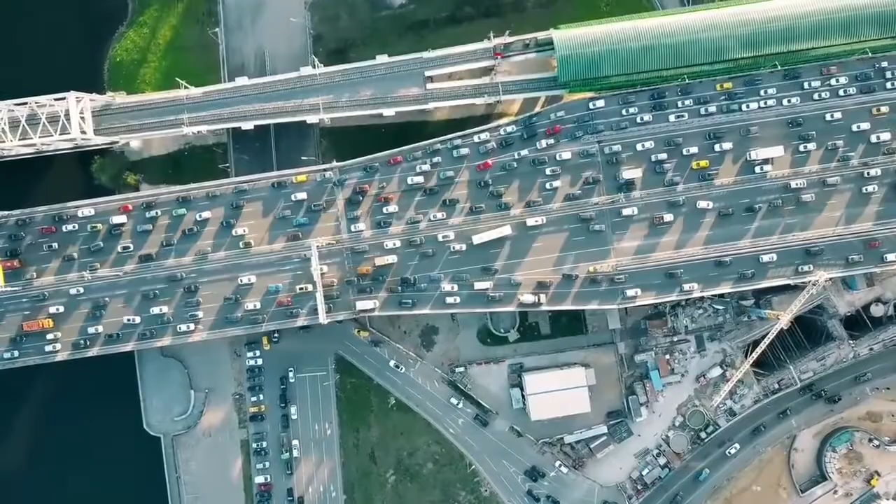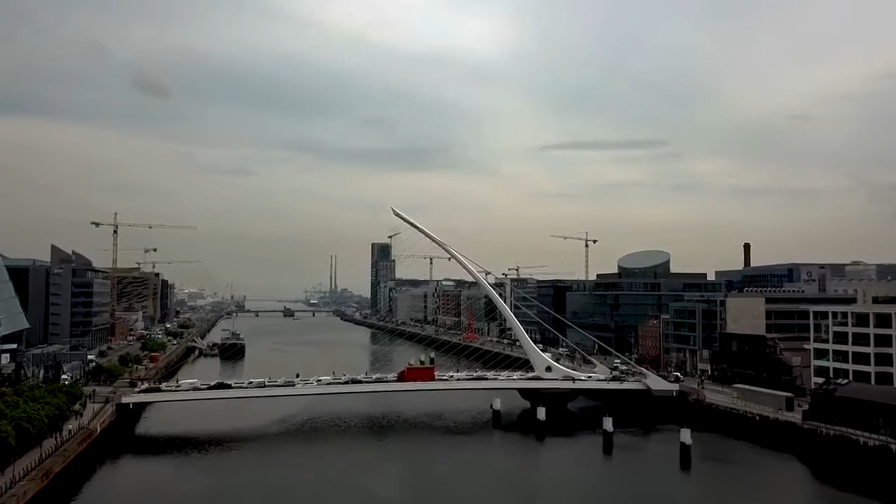This is a problem that primarily affects young people, and those who already own their home have little interest in devaluing it by allowing high-rise developments near their home, and thus increasing supply. There are political motivations and many more factors that change why and how bubbles like this occur in different cities, but if we're going to build a sustainable future, we are going to have to rethink how we build and plan our cities. Let's next focus on minimizing the building cost of these buildings.

In theory, taller buildings reduce square meter costs of floor space the higher you build, and increase the overall returnable revenue from a single plot of land. However, the cost increases as you build higher and higher. Lift systems, fire prevention measures, water supplies and pressurization, and heating and cooling systems all add to the cost of high-rises.

Costs like these lead to a U-curve in regards to the cost per square meter and height, where the cost per square meter initially decreases with an increase in height, and then starts to increase after the height reaches a certain point due to the increased engineering demands. Every curve therefore has a bottom out point. This bottom out point is different in every city and varies widely even within the city.

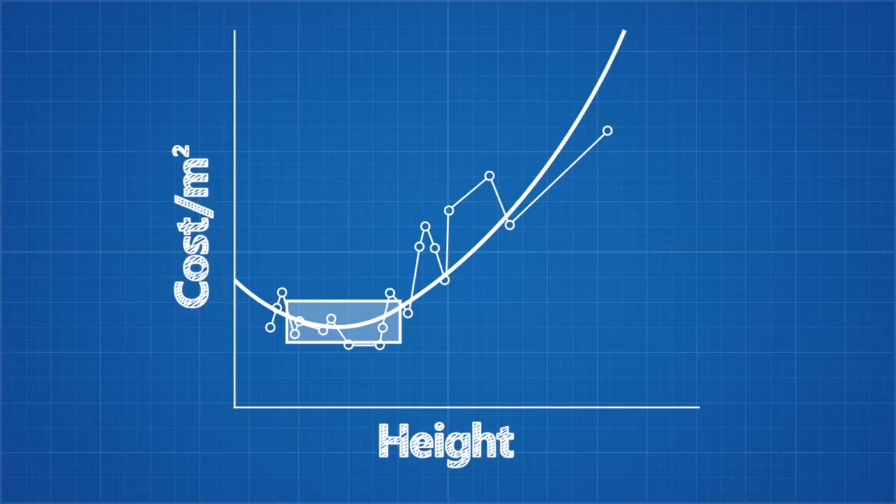But on average, the lowest cost per square meter in Shanghai and in the Netherlands, for example, is around 8 stories. In Hong Kong, thanks to the limited land area increasing land cost, it's around 12 stories. The additional cost of engineering can be marginalized by high costs of land, making it worthwhile to build higher. Let's next focus on minimizing the building cost of these buildings.

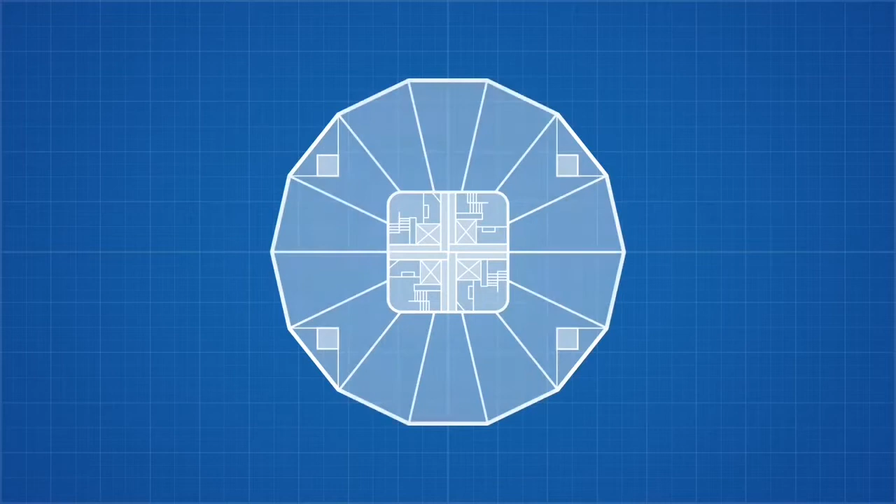One of the primary causes of increased cost with increased construction height is the necessity of using floor space for the structurally integral building core, which keeps the building standing and houses elevators and other services. While there are many ways to design the shape of the building, certain floor plate designs end up being more desirable than others to maximize usable space.

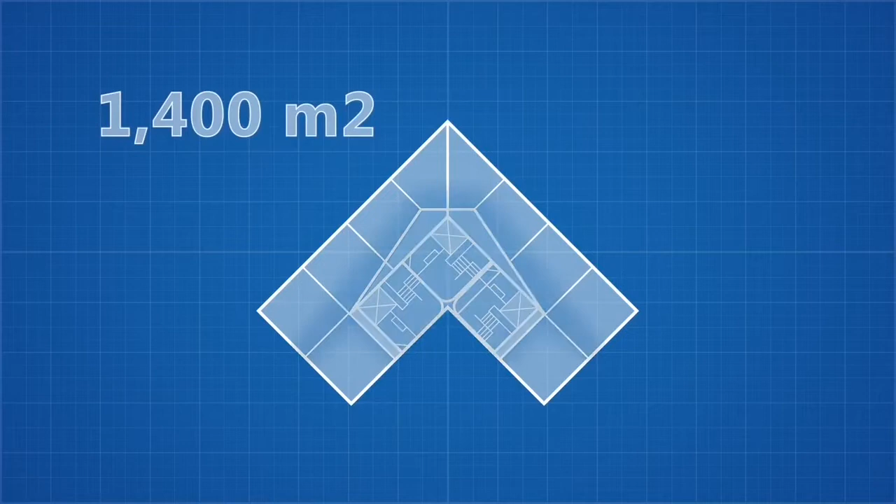Say that the gross area of the floor plate of this building is 1,400 square meters. The core of the building of this shape and size would need to be around 335 square meters. This gives a net area of usable area of 1,065 square meters, and thus a net to gross ratio of 1.31. So a design like this is stylish, but when you analyze the space efficiency, it's not great for maximizing floor space.

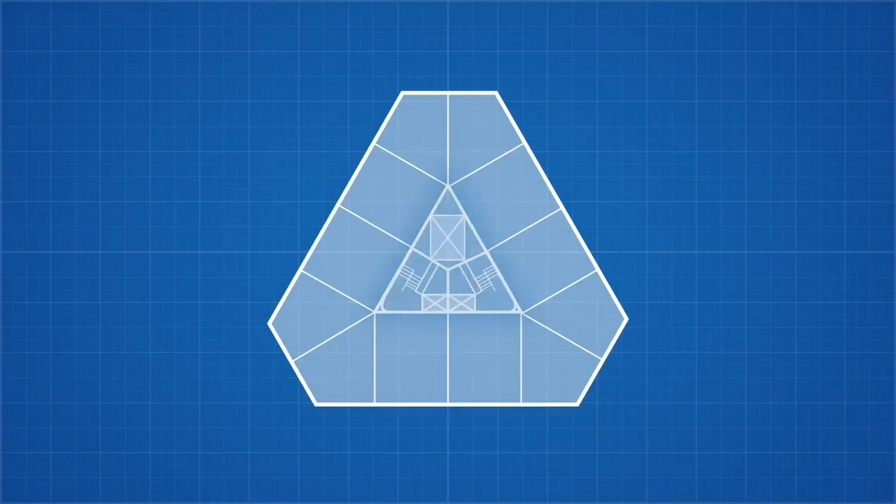A building like this seems like it might have a bit more usable space, but the building core is still taking quite a bit of space compared to the livable floor area. This design's net to gross ratio is around 1.26. And a building with this shape may not be as exciting, but its core area is minimized compared to the usable space. Its net to gross ratio is only 1.14, which is about as good as it gets and is exactly the floor plan of 432 Park Avenue.

While variety and expression in building design are important, these elements invariably add cost and require careful design consideration. When affordability is an issue, simpler designs are better. Wall-to-floor ratio is also a critical measure of cost efficiency. It expresses the perimeter length of the wall that has to be constructed for every unit of floor area, so from a cost perspective, the lower the ratio the better.

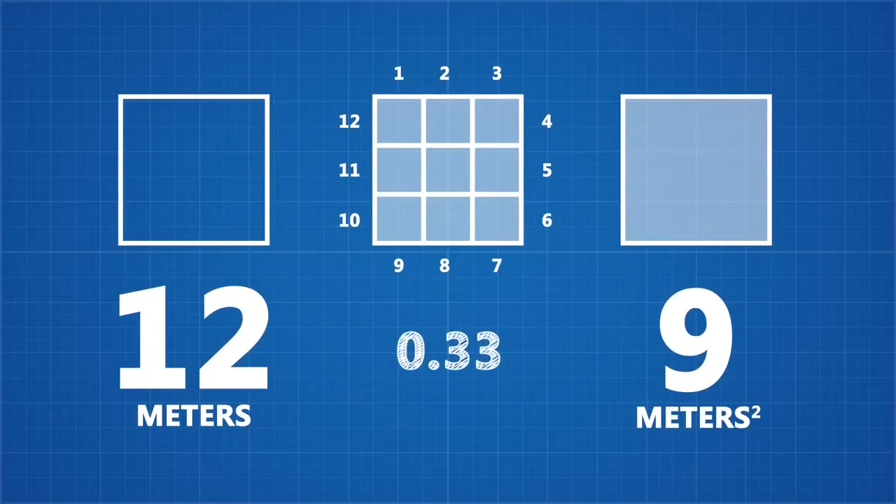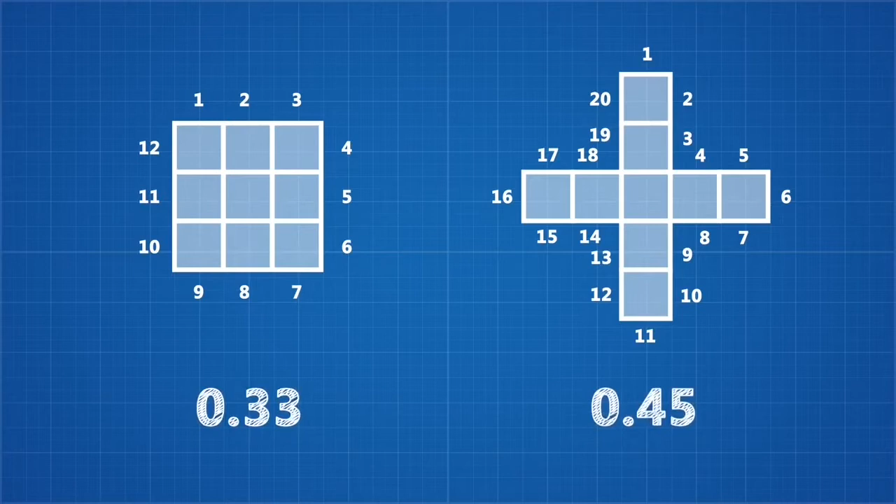Using simple geometry, we can see that a 3x3 square has a total perimeter of 12 meters. This would have a wall-to-floor ratio of 0.33. A cross shape with the same area of 9 square meters has a perimeter of 20 meters. This would have a wall-to-floor ratio of 0.45. When constructing buildings, this simple principle is the same. The more perimeter wall needed per floor area, the more expensive things get.

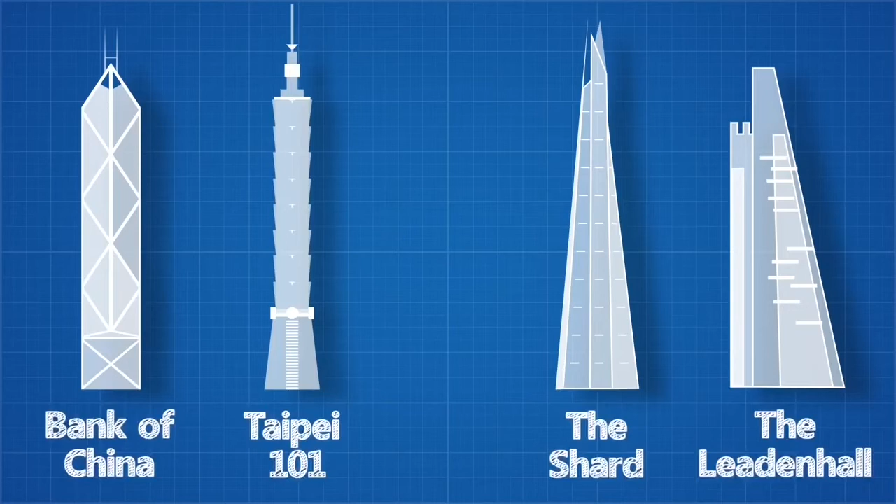A comparison of Asian and London towers provides an interesting contrast on approaches to wall-to-floor ratios. Tall Asian buildings score between 0.3 and 0.35, while London buildings score between 0.35 and 0.6, with the majority above 0.45. This is because the Asian buildings have larger, more regular floor plates with centrally located cores.

So the design of our tower has huge effects on our cost, but so do construction techniques. Traditionally, towers are built using repeating floor design with molds called formwork being used to cast the concrete structure. Despite this essentially being a vertical assembly line, it can still be labor intensive and slow and is exposed to variabilities of site and weather conditions.

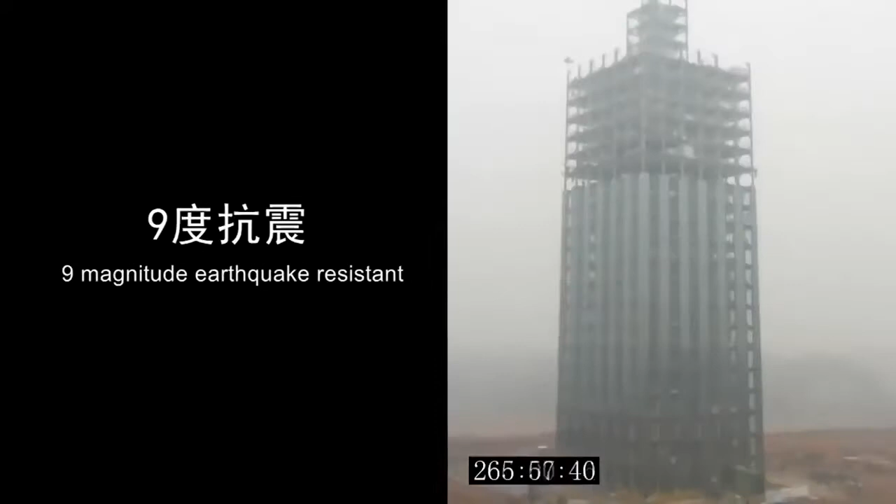Prefabrication and off-site construction is increasingly becoming an appealing option. This can offer high-precision solutions created in factory conditions and often reduce on-site delays and help progress construction even in a market with a skills shortage. An extreme example of this idea of prefabrication is being used in China, where a company called Broad Sustainable Building built a 30-story building in 15 days for a cost of just $1,000 per square meter, and later built another 57-story building in 19 days.

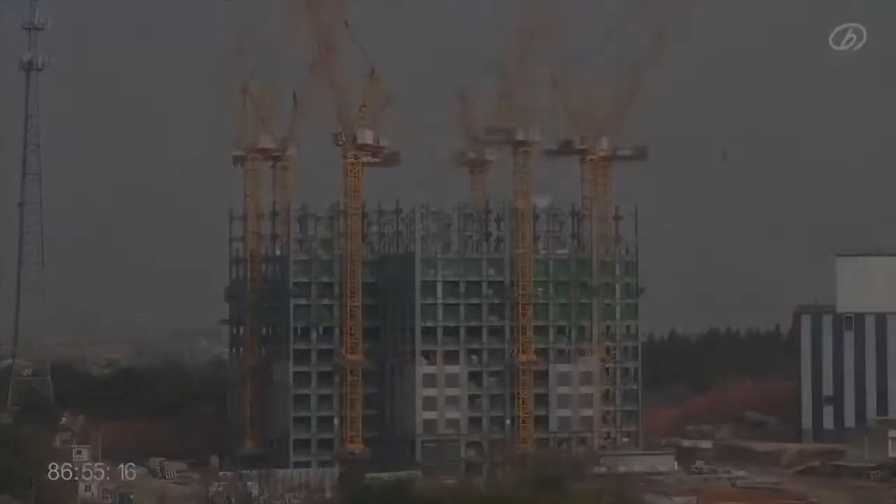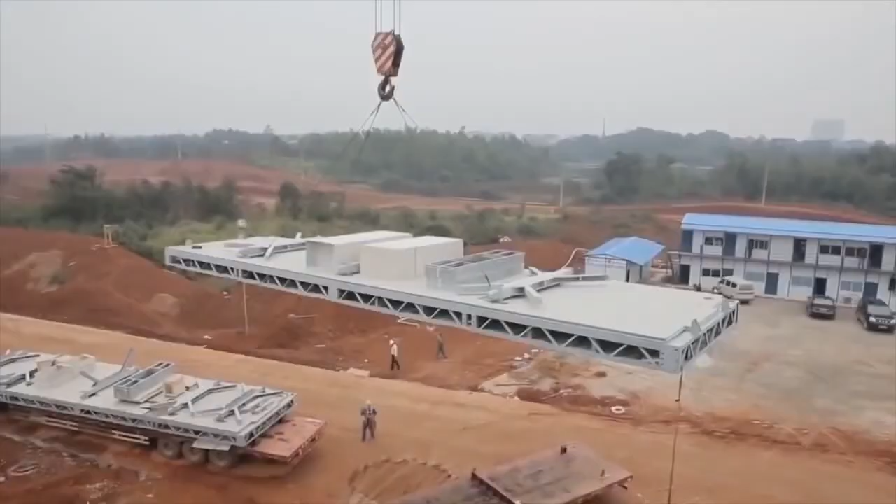The building pieces are fabricated in sections at 2 factories in Hunan. From there, the modules, complete with pre-installed ducts and plumbing for electricity, water and other infrastructure, are shipped to the site and assembled like Legos or flat-pack IKEA furniture. The company is in the process of franchising this technology to partners in India, Brazil and Russia. What it's selling is the world's first standardized skyscraper.

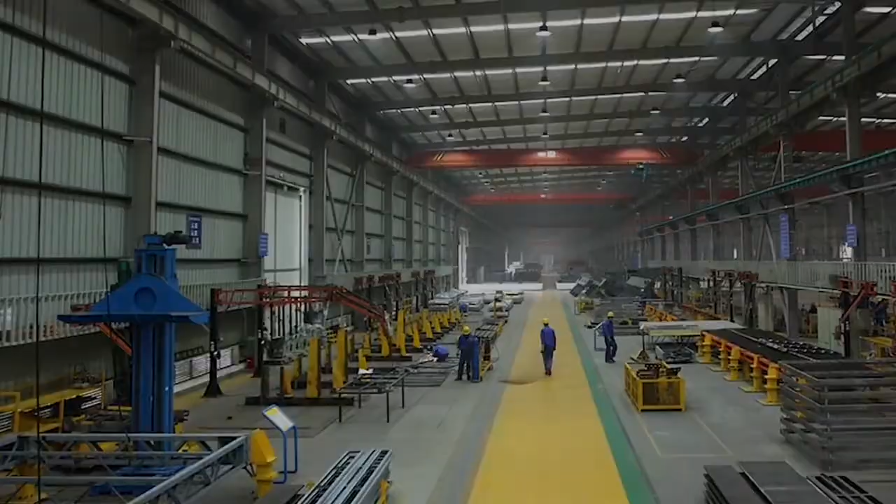One of the primary cost drivers for skyscrapers are the labor costs for specialized workers. By outsourcing much of the construction work to safer, controllable environments like this, we can reduce the costs. Building higher facilitates cost-effective public transport, reduces commute times and creates a more livable city, because their height enables a huge number of people to work and live on a small piece of land. That is something our world is going to need going forward as our populations continue to grow.